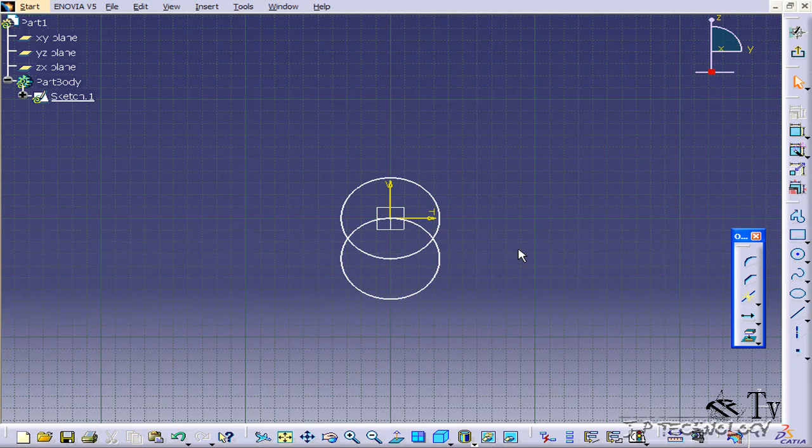Now I'm going to press Ctrl Z, and we're going to do it again. Let's click Translate, and this time let's make 10 translations. Click the center point, and you can see that if I zoom out, I have 10 translations. I'm just going to snap it to the edge like the last time.

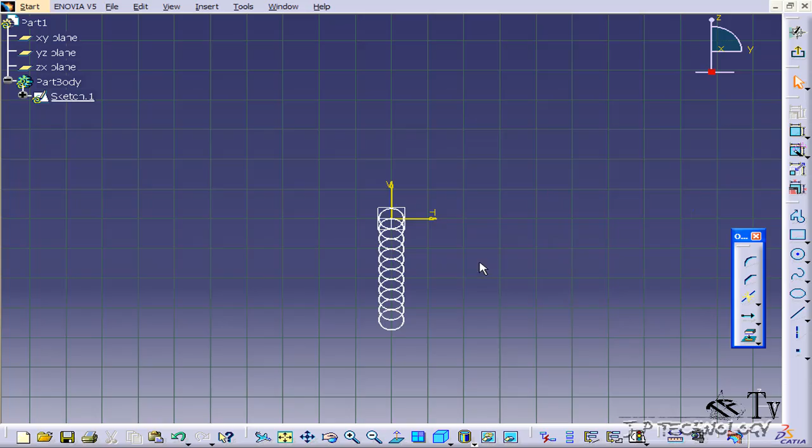Now let's press Ctrl Z again. This time what I'm going to do is make a profile. I'm just going to draw one over here. Again, this would be a profile that you wouldn't want to redo, so what you'd want to do is just translate it.

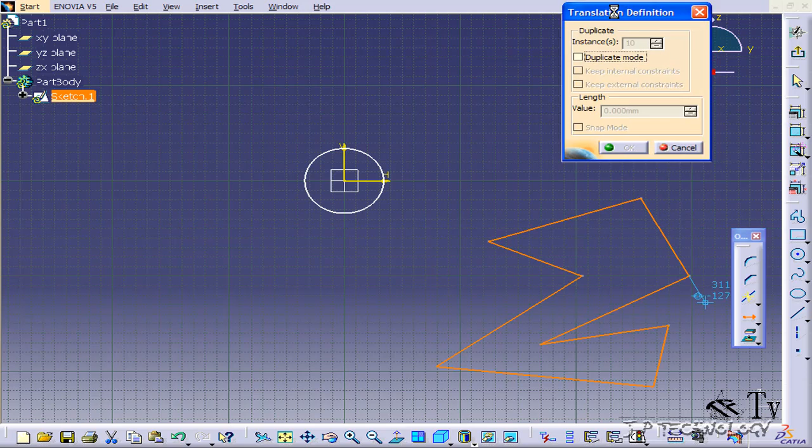So we're going to click Translate, uncheck Duplicate, and just move it over. Click on this point, or any point, and then you're able to translate and move it over. So let's move it up here. The sketch moves there, and we can do it again.

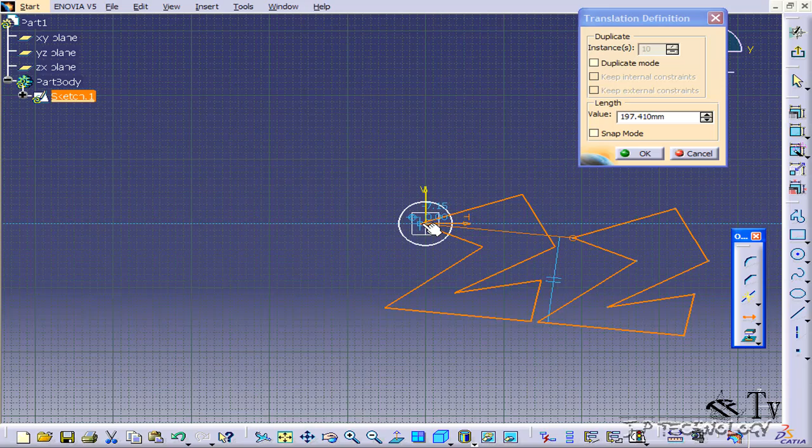We'll translate it from this point here, and we can pull it over here. Now let's put this point onto the center point. So we'll click Translate, click this point, and snap it to the center point.

So you're able to have points all over that you can translate and snap your sketch and move it to that position. Again, this is a very powerful tool as it lets you duplicate your sketches and translate them. These are time savers, as it would take you too long to redo your sketch and dimension it and put it in that position. With Translate, you can just grab it, duplicate it, or move it to that position.

And that concludes our tutorial on how to use the Translate Sketch feature within CATIA V5.